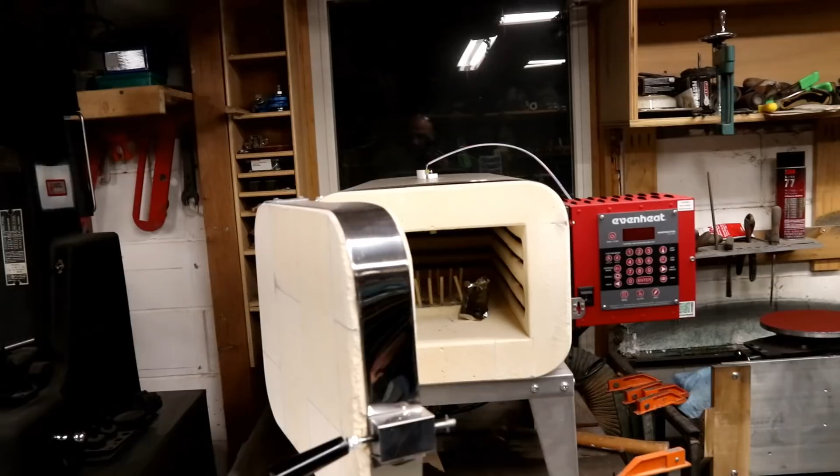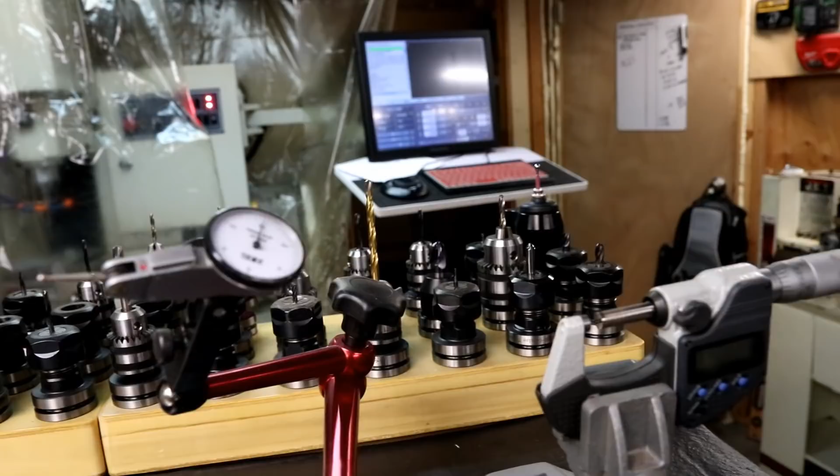Quick little spin around his shop - he's got a really nice setup. It's got the grinding station there, the heat treat station, and over here, the real reason why we're here, the 770 and all his tools set up. So I know I made it look like I just showed up, but I didn't.

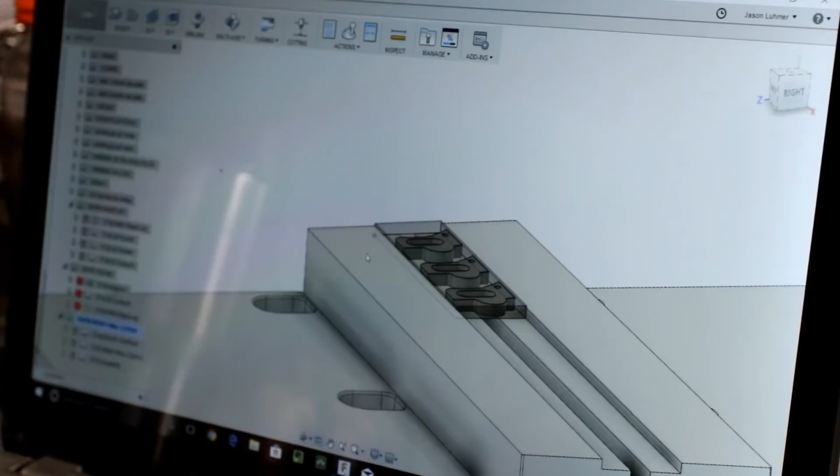I've been here for a few hours, and we've been working on some CAD and CAM stuff and doing a little photo stuff too. So he's got his laptop out. Yeah, so here we're working on lock inserts, and I'm just going over with Mike, showing him the CAM section. We spent a lot of time doing the model and the CAD section - he's got that pretty much down pat, so we're breaking into CAM tonight. I actually have to run some inserts for my Raven, and this is a relatively new program, so we're going to load it up, see how it goes. CAM, it takes a lot to learn. I just got modeling - we're really playing video games. Right.

Yeah, we were playing Assassin's Creed, and shopping on the internet and buying all kinds of new tools. Jason totally tricked me into buying a, what is that thing?

A 3D printer. Let me show you why. You guys got to see this. Alright, Mike, let's see if we can open his computer up real quick.

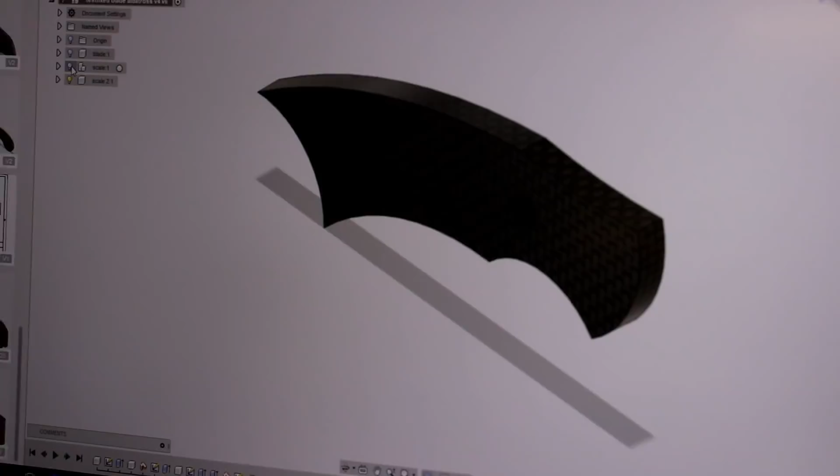Mike showed up and did an awesome job. This is a scale for one of his new designs, and you can see it's not in Mike's signature style. Mike doesn't really like the slab sides all that much, he likes to round everything off, but it's kind of an advanced move and kind of difficult to go ahead and round this off.

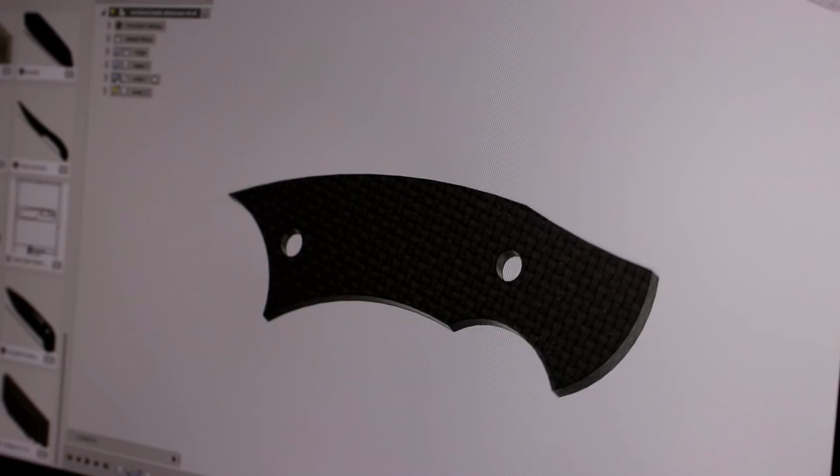So we went through and I showed him how to model, basically turn that into this. It's the same exact thing. How cool is that, guys? It's all contoured and nice. It's going to feel great in the hand.

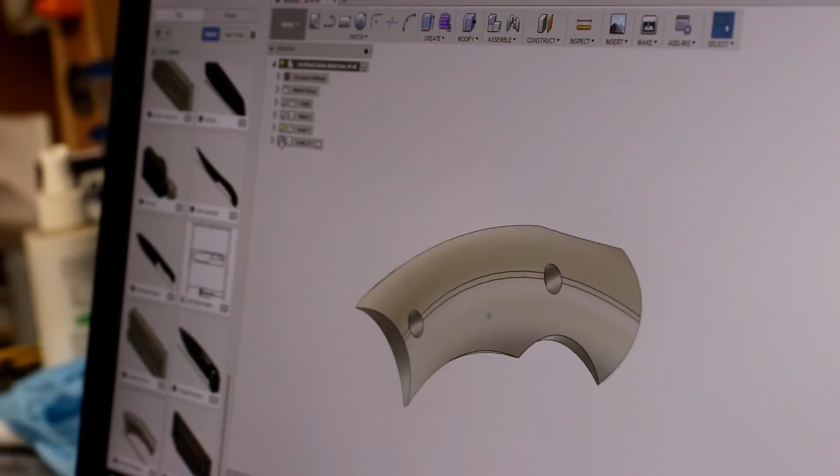Right off the machine, you can contour it to this instead of having slab sides with chamfered edges, which is nice too, but I wanted to get this contoured, kind of like a 1911 pistol grip. Which it kind of looks like. Actually, if you hold it that way, it looks like it could be an old revolver grip.

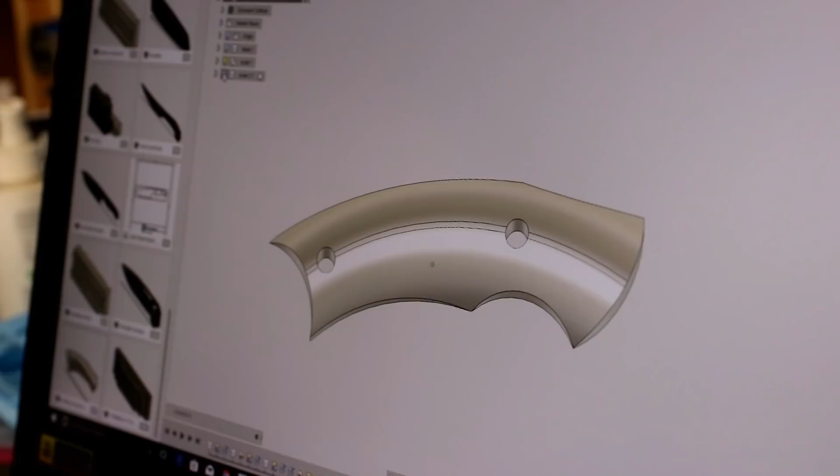But the most important thing is you're not going to be setting yourself on fire at the grinder anymore. So I told Mike, hey, he was asking about this printer I got right here.

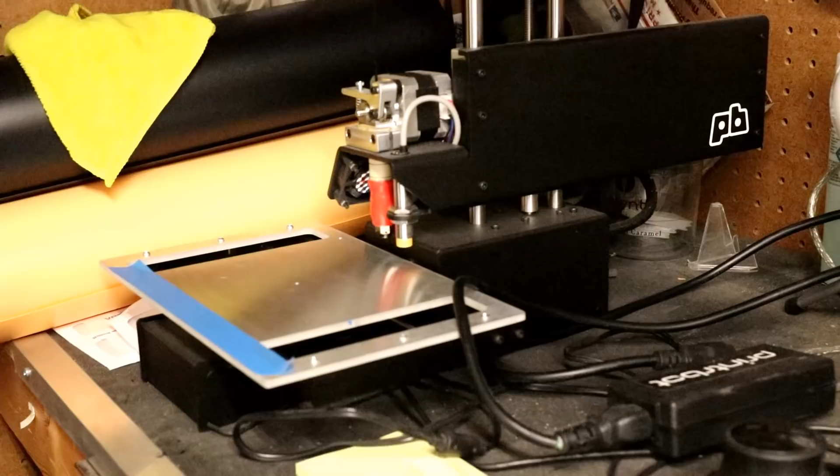It's a Printrbot. It is the best 3D printer for the bang for the buck. I mean, it blows my mind. So I said, hey Mike, this is what sold me on it.

I said, hey Mike, you know how I use it for everything now. I use it for my prototyping, so I'm not blowing money on titanium just to find out I put a stop pin somewhere. I made this entire knife on it.

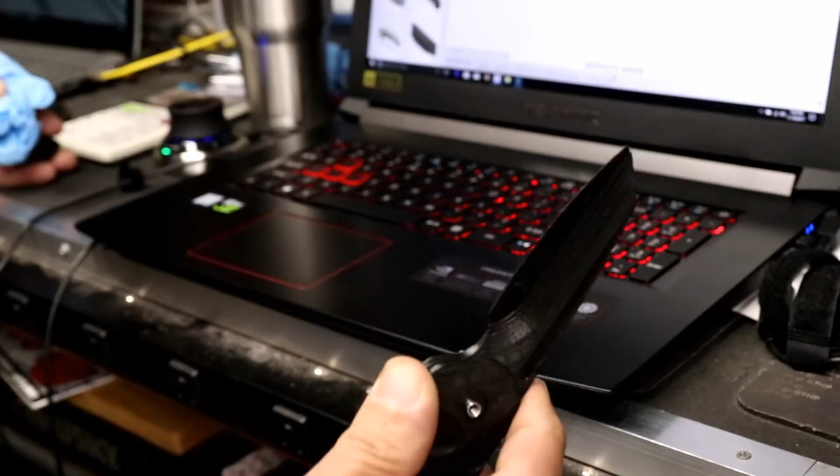It doesn't flip that good, but it's got everything. I took the stop pin out, but the stop pin hole, everything's in there. Pivot, backspacer, lock bar is cut. I mean, it's not a lock bar cut, but it shows me everything.

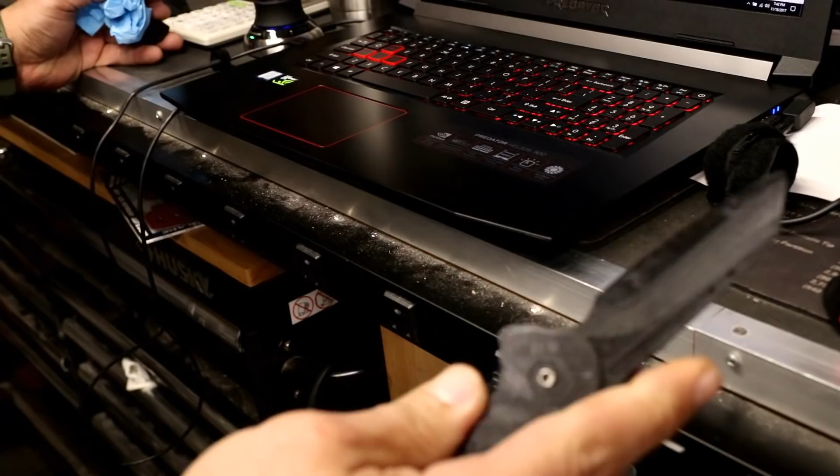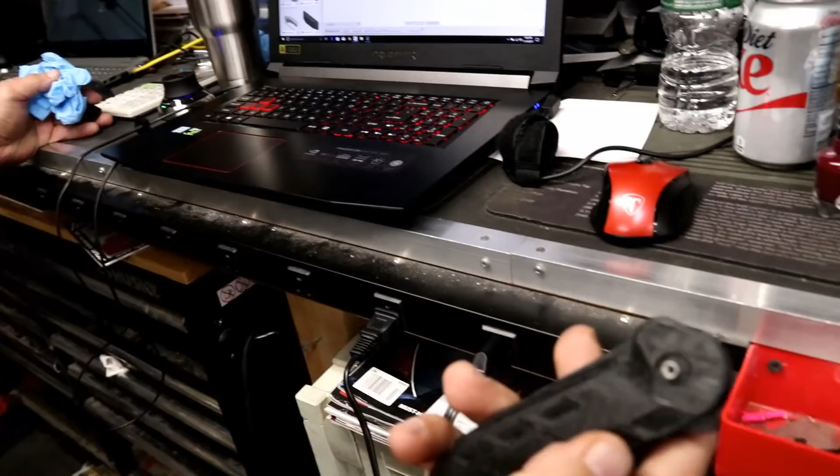Proof of concept. Put something in my hand, open my drawer and show them this knife. So this is his new knife, his FET model. He calls it the Merc.

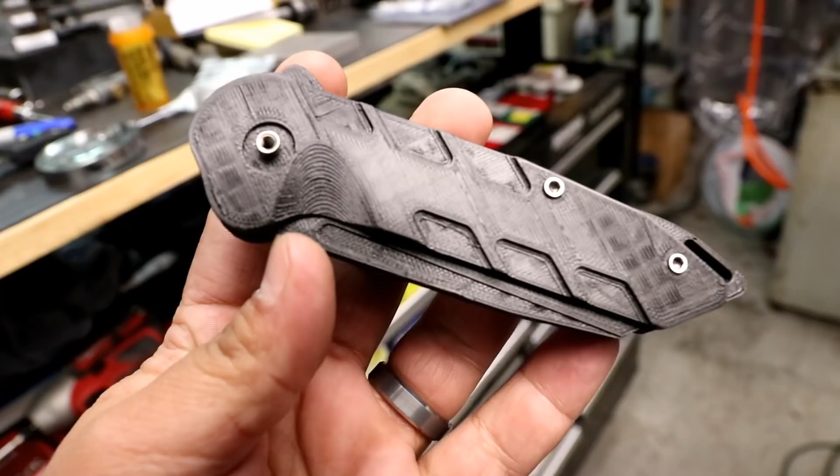And this is the 3D printed prototype, so he didn't have to waste all kinds of money on titanium and saw blades and do it the slow, hard way. Now we can see if this knife feels good in the hand, if the action is going to bump into the backspacer or anything like that.

So we have the, oh not this one. Here we go. The completed model is this guy right here, and I'm not going to pick it up because I have a ring on my finger and I don't want to scratch it up. Oh, you're going to scratch that? That's Cerakote, this is made to be beat the hell out of.

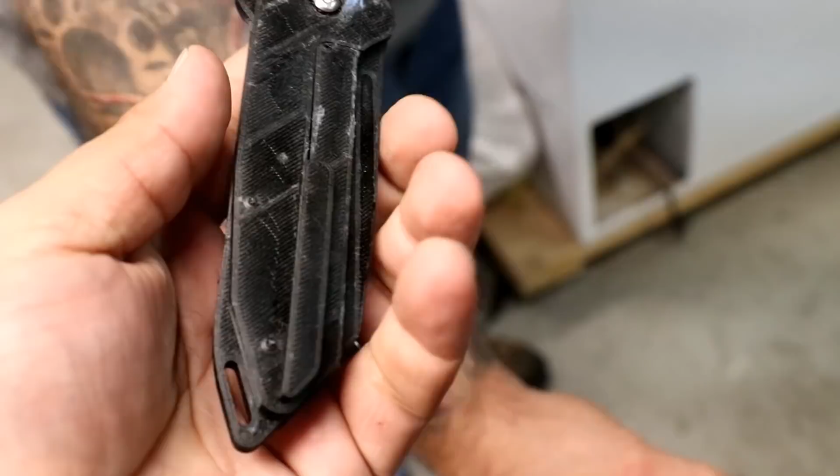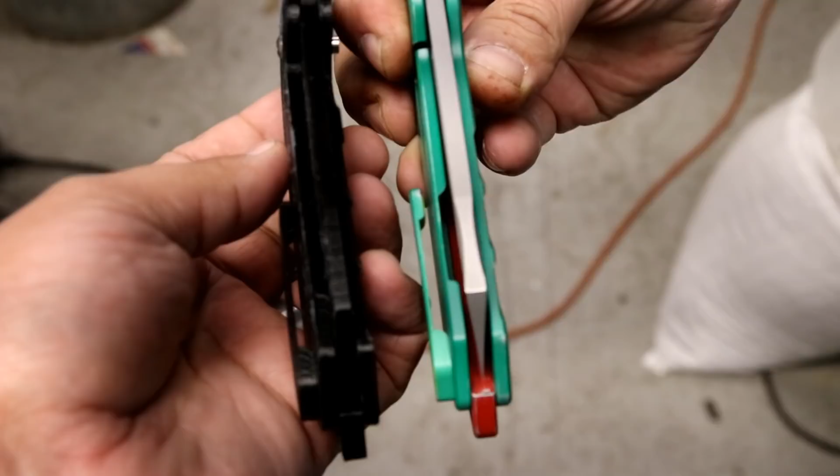There we go, Jason will hold it up for us so we can compare. If it'll focus, come on focus. There we go. You can see it's literally a one-to-one prototype of the exact same specs, just printed on a printer.

It saved a ton of time, a ton of money, and contrary to what people say on the internet and in forums that it'll take 3-4 hours, that printed in under an hour. And you don't need a 12-inch by 12-inch bed, this works with a 6-inch by 6-inch.

Yeah, I'm not going to do Bowie knives on it or giant fixed blades, but for what I'm doing, it works perfectly. So anyway, back to what we were talking about.

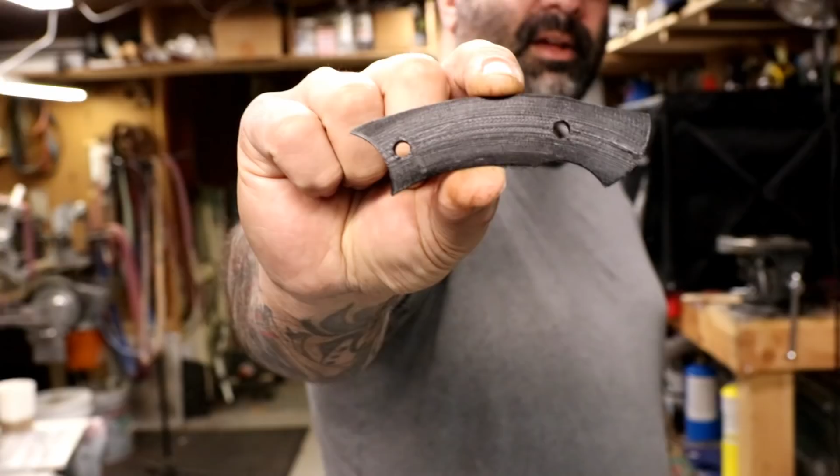We printed out that scale that you just saw, and we'll go over to the computer so you can hold it up next to it. This is a printed prototype of one of my scales, and this is exactly one-to-one of what it would look like. We'll hold it up to the computer here.

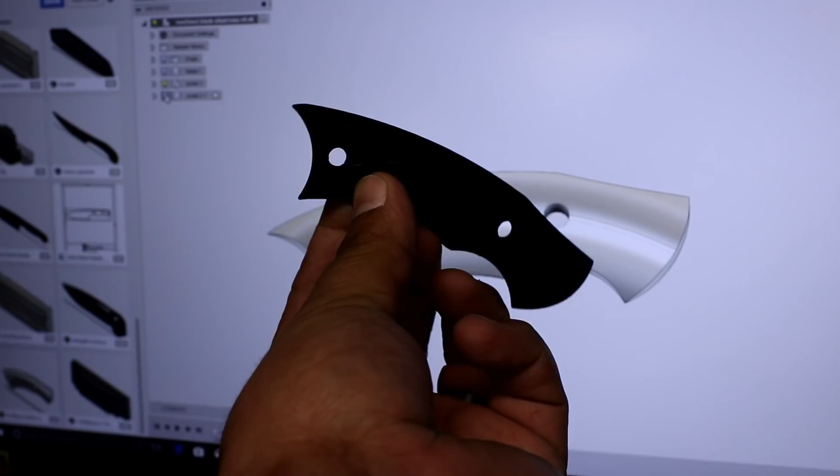It's exact, as if I made it in the shop—life size, everything. Of course, this is a karambit, so it would have a pinky hole. Now I can see if there are any hot spots, any problems with it. And so far, so good.

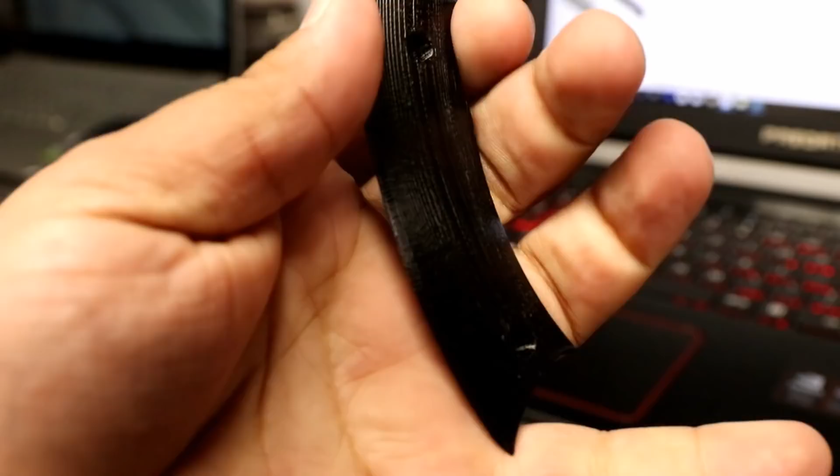I like this. After he printed this, I had to have one of these printer bots, so I went and ordered one. We'll see how much I struggle with it, but it doesn't look too terrifying. You'll be fine, there's no fixturing involved, nothing.

Mike's a bad influence too, because he came over. I have trouble taking pictures of my work.

So I talked him into one of these, and this is probably going to blind the camera, but it's a photo box—an incubator for chickens. Right, yeah, the chicken incubator. As you can see, it lights up everything nicely.

I'll pop in a couple of pictures here to show what good lighting can do for you. This is like a $50-60 box on Amazon. Totally worth it, and really helped us clean up our pictures really nice.

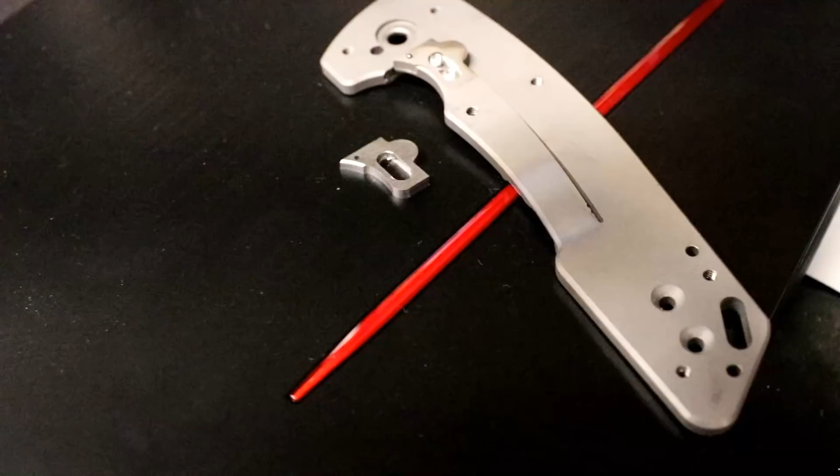Right here, this is what we're going to make right now—this little part right here, and this is focus. There we go. This is just a steel lock bar insert with a built-in over travel that Jason has designed for his—this is his Raven.

This is one of his scales right here, and as you can see, he has one installed, which is nice because—hear that?—it won't over travel, but he has clearance enough where you can easily unlock the knife and clear the detent ball and everything.

So he's really figured out the tolerances, and this is just a great example of machining a small part, something that I could learn. So he invited me over today to learn something easy, instead of tackling a whole knife at once—we're going to tackle it little piece by piece.

It's kind of cool checking out another maker's space, the way he has everything set up. So we're going to go check out the machine, but I just want to show you the other corner real quick, because a lot of people give Jason a hard time about it, but I love this setup.

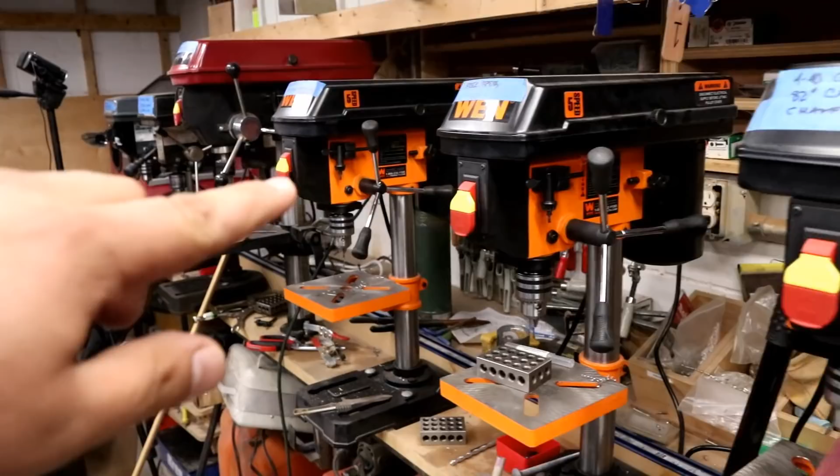Yeah, I'm showing the drill presses. Look at this—talk about, you want to see somebody drill some holes really fast? He's got a drill press for everything that he does, and this way you don't have to sit there and fumble, and he's got everything labeled.

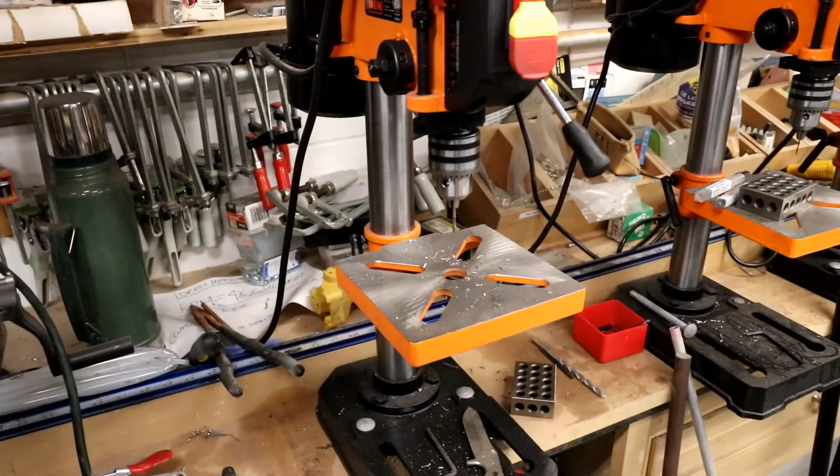Right here, number 31 drill, and that's what the drill does, that's the RPM he runs at. Super efficient guy, and I really love to see that kind of stuff.

From ancient drill presses to brand new Wens over here. Oh, I got my big ancient one that's going to be coming, I just haven't put it in here yet. Right, yeah, he's got the big boy coming back.

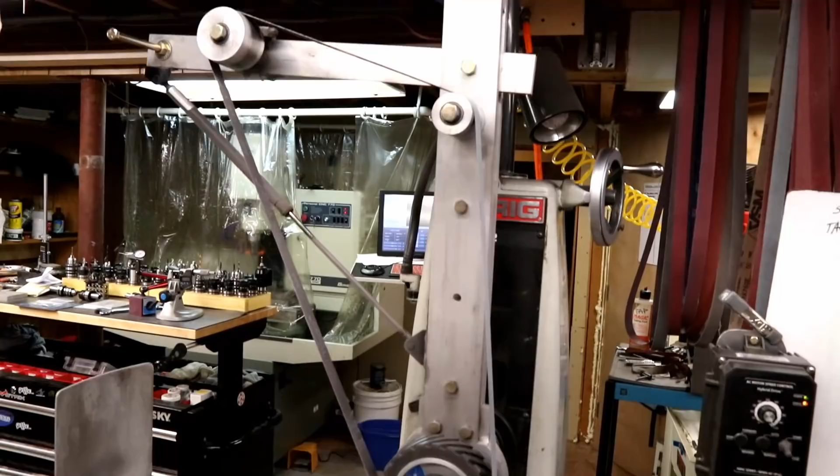And then my little 440, the baby CNC. Hey, does this look familiar, guys? You remember when I showed you this? Well, guess who did it first? That's why mine looks exactly the same.

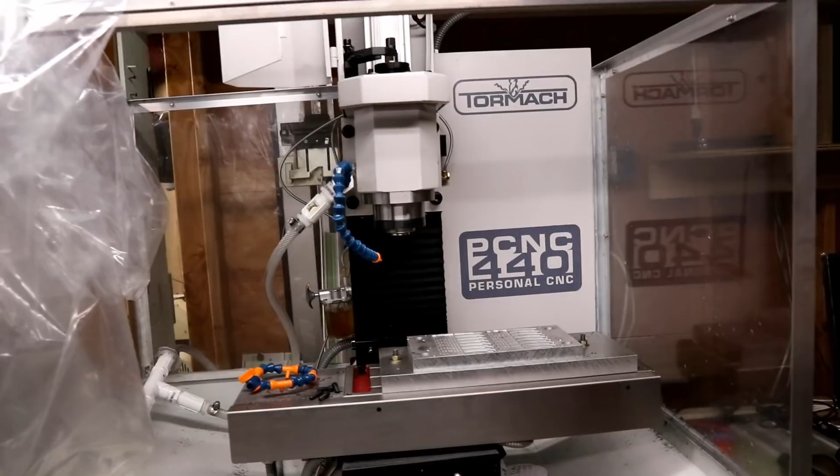And he's got the little 440 over here, and he's got pocket clips for his Raven all set up in here. So this is his dedicated pocket clip, but he was saying that this machine can hang with the big boy. So just real quick, if you want to say something about the 440.

This is what I'm going to say—I have both machines, as you guys see. The 770 is a superior machine because it has more bells and whistles, it has a bigger work envelope, but the 440 will do everything the 770 will do, and it's great surface finish.

And don't let internet influence you. These are the pocket clips that I make on there—titanium. I mean, this surface finish is good.

Why don't you show them some of the pattern that you put on top of them? Oh, this one with the pattern. Yeah, take a look at that, guys. That's all done on the 440, and this is intricate work, including thread milling.

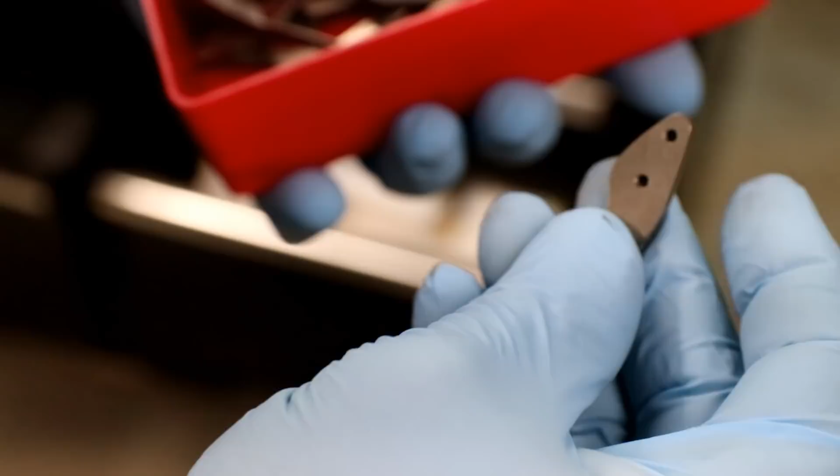These are blind holes, 440 thread milling. Yeah, that's for those of you that are not familiar with thread milling—you take this tiny little cutter. Let me see if I can show you one.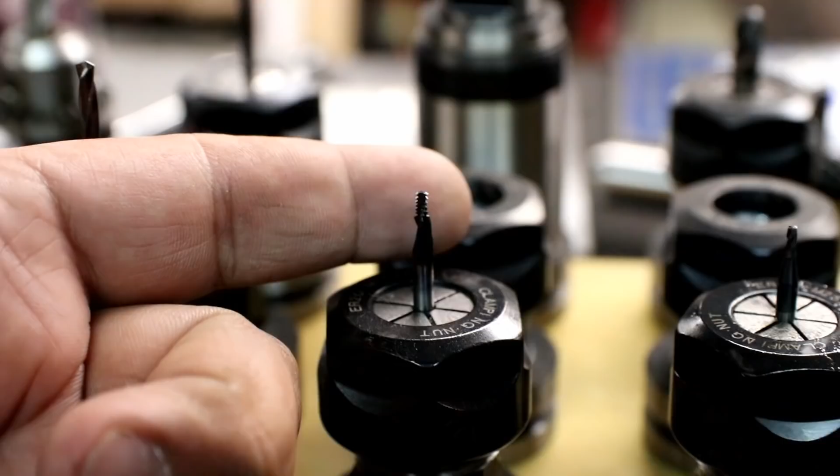They're like $60 each, and they snap like toothpicks. So a lot of people think that the Tormach machines can't handle it. But how many holes have you tapped with that? Geez, probably 1,000 holes, and that's the first one I had. I was very concerned and very nervous that I was going to break it because, like Mike said, they're $60 each, and you know I'm not a rich man.

A lot of people say that the Tormach is not an accurate machine, but the truth is for knife making, it's plenty accurate. I know a lot of guys that use it. The guys having problems, they got to look at their setup and their material prep. That's probably the biggest thing they got to look at. It's very important, even to do what we're doing.

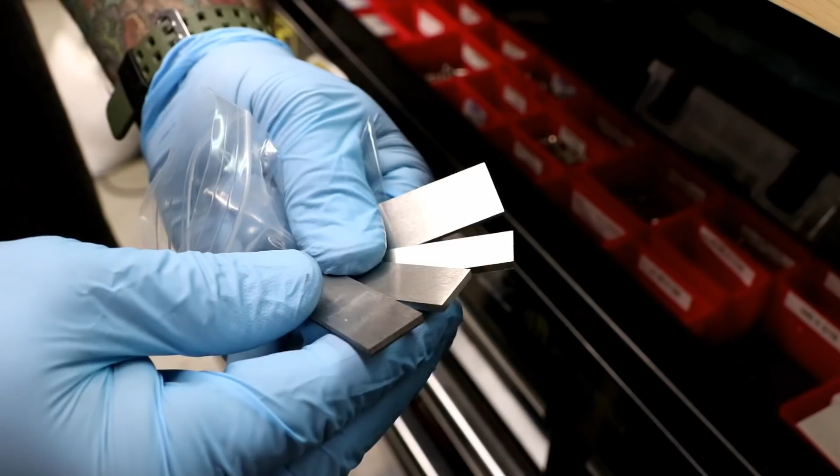These inserts, this is the material that I prep for. You can't rush this kind of stuff. These are all surface ground, exact thickness, and squared on all four edges, so that when I put them in, my CAD works. The numbers in real life are the same as in the program. And when they're sitting down, they're sitting in that vise flat and you're not having problems.

That's not saying mistakes don't happen. Who knows, we might have a nice little crash today. You never know, right, that's just the nature of the beast. But you have to be very detail oriented and have a system of checks and balances when you're doing this to help mitigate any type of problems.

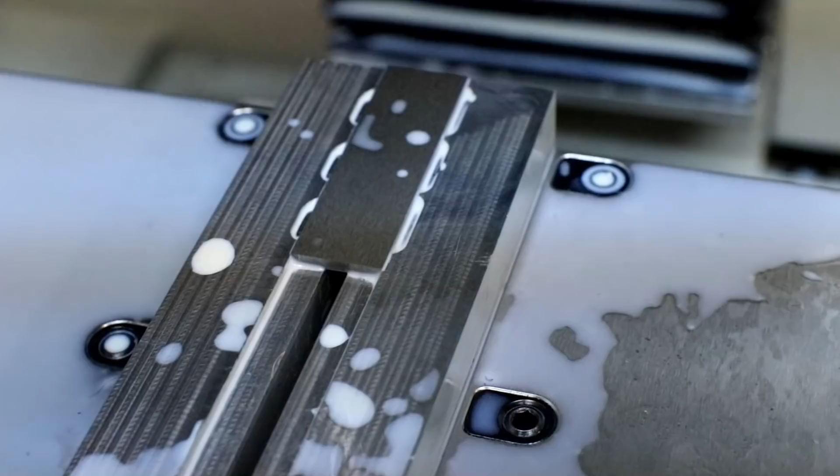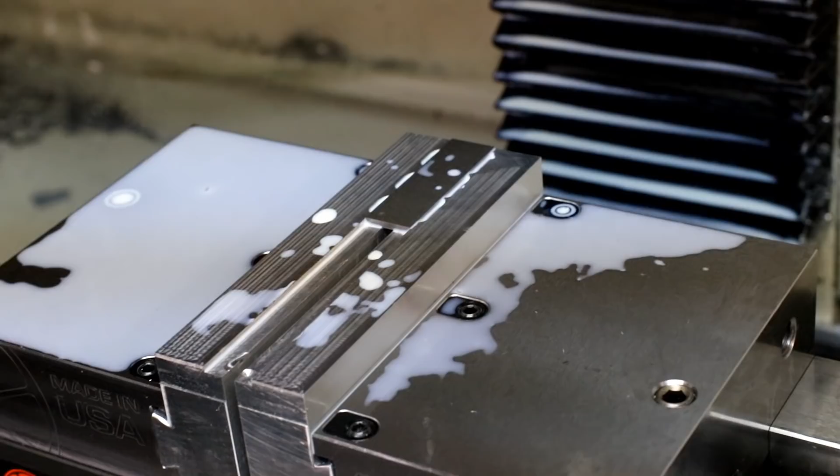He has his precision stock that he made precision himself. It wasn't precision when he got it. What he's trying to say is these machines are only as accurate as the stuff you feed it, including the information, the parts, the raw materials. That's one thing he's been really hammering home with me, trying to make me understand. And that's how you get it done, how you get the tolerances and the desirable results.

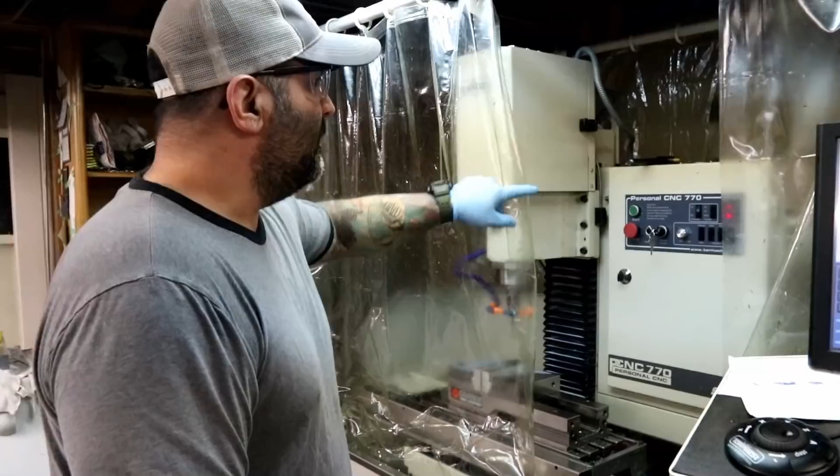We just loaded everything up, we're going to run it. There's my beautiful enclosure, the dirty shower curtain. You see where I got the shower curtain idea from too? Hey, it works better than the $2,000 Tormach enclosure that everyone says leaks like a sieve. This doesn't leak anywhere.

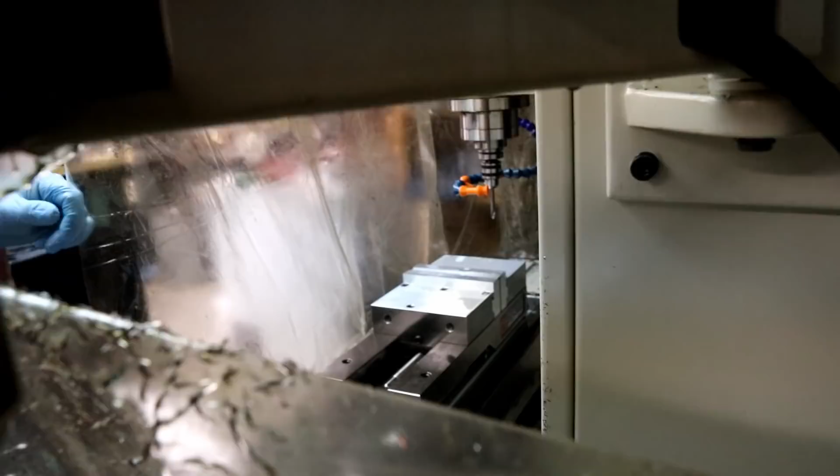All right, so we're going to go through this little hole in the back here, my observation hole. When I first started, I used to hide there when I'd hit cycle start so I didn't get hit with something. Alright, I'll do my best to hold it steady.

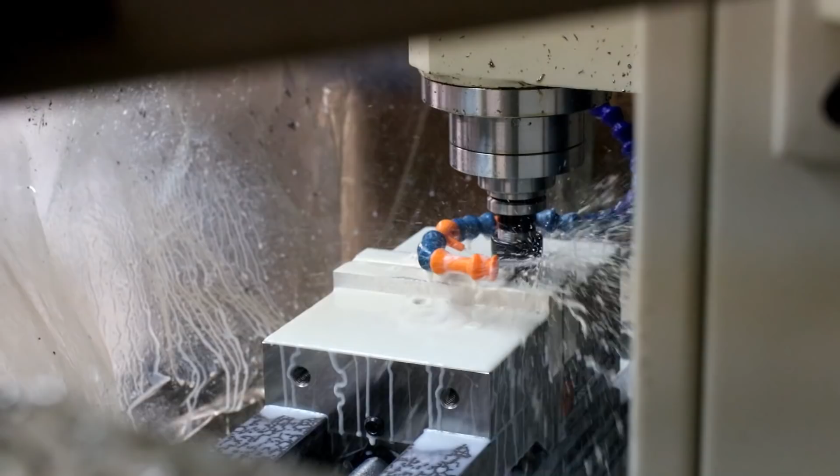There we go, now it's digging in. I'm running it kind of aggressively. This is S35 stainless, I'm pushing it fairly aggressively, running at 6,112 RPM and a feed rate of 12.2 inches per minute. Works real good. With smaller cutters, contrary to what you'd think, you could push them pretty hard, and I'd rather get the efficiency out of them.

Things that break, you hear it under strain. As you're working with this stuff, you're going to learn when it sounds like it's going to break. It's a very fine line.

I've heard that a lot about machining by ear. Years doing carpentry, you learn, and you guys that work in the trades with saws, you can tell when a saw is going to kick back cutting through a sheet of plywood because they'll start to bind. That sound right there, you can actually hear the chips cutting. You're not worried about it breaking, but if you're not used to that, you're going to think, oh my goodness, it's going to break.

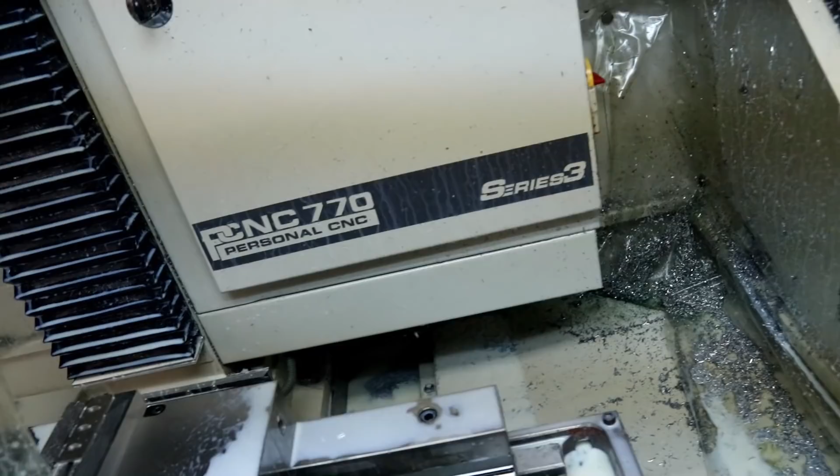We'll take a look at this op, and you guys have seen machining before, so we're not just going to film the entire thing, but as you can see right there, it milled those pockets. Now we'll cut it here, and we'll come back when we have the finished parts and show you, because right now we're just going to change the tool again.

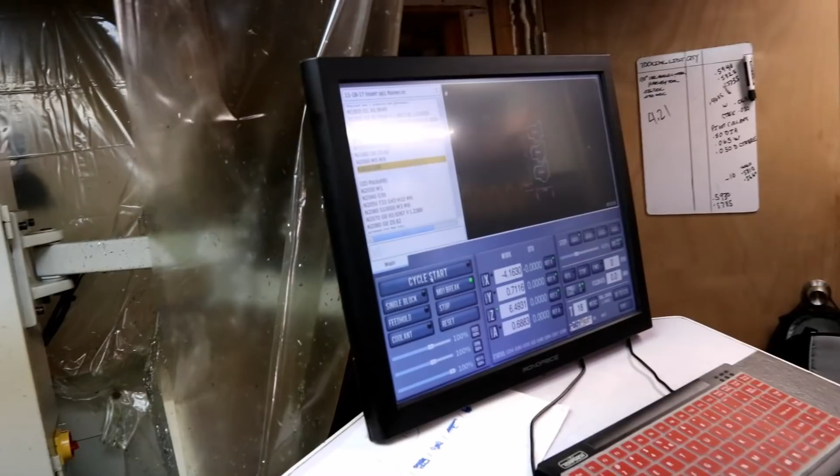Yeah, we're just doing another tool change. We're going to go in and do the secondary pocket. That pocket right there was for the flange to hold the screws down. Now we're doing a secondary pocket with a 16th inch end mill for the 256 screws. It's tiny, kind of intricate. Then we're going to do a contour with the 1/8 inch to 50 thou, and then we can pull it out and show you guys what we do. It has to get flipped and put in another fixture, and the rest of it cut out, and then it's all done.

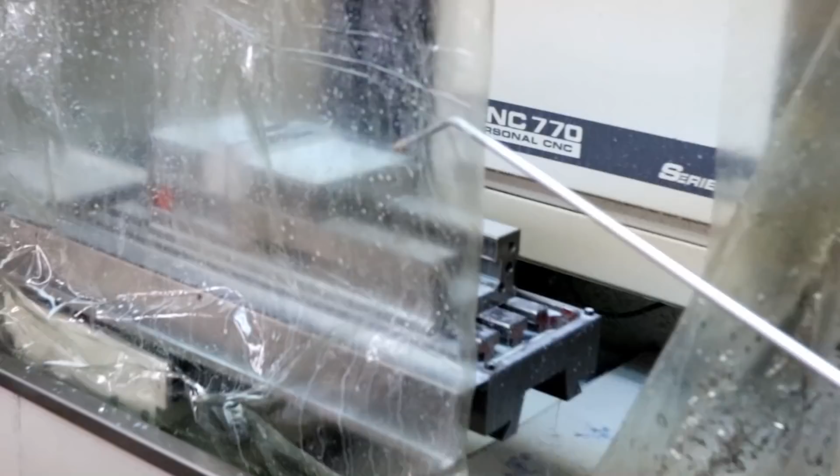Alright, so it's been about 7 minutes. We're just blowing it off now, and we'll take a look.

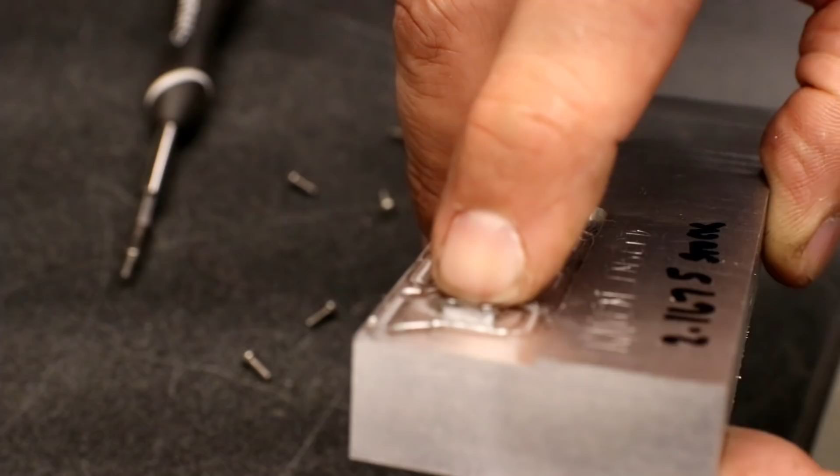That first op is done. There's those lock bar inserts. This is the fixture right here. Those little bosses mimic what I have inside of my lock bar that holds it. So this is machined to just snap right in. I'm sure you heard the snap. There's zero play any way you go. That's how accurate, and these are tiny parts, that's how accurate the Tormach is.

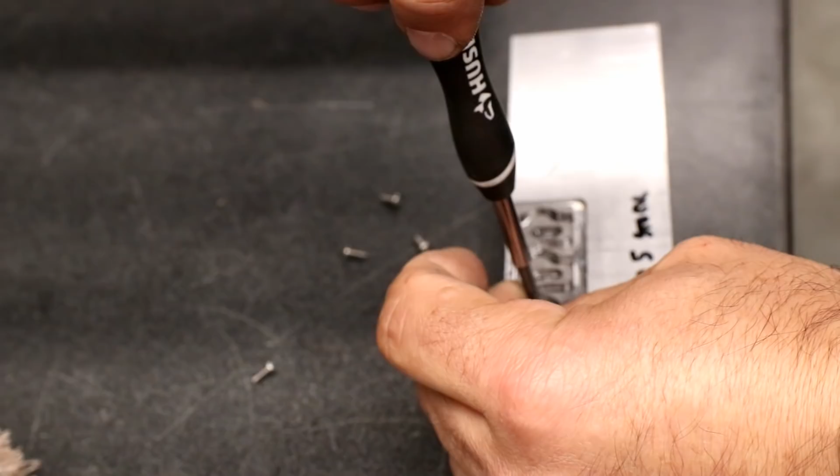So I don't care what anybody says. If somebody says their Tormach is not accurate and that's why they're not producing accurate parts, that's because their setup is not right, they're doing something wrong, or there is something drastically wrong with that particular machine. And I'm not a Tormach fanboy, believe me. Neither of us are. I've had the Tormach rep here twice already for other reasons. And all the problems that I thought I initially had with it were because of my setup.

Because once I changed my setup and really took the time to learn, that machine sat for how long, Mike? Like 6 months before I touched it. At least, yeah, I had it here. I'm coming up on that now too. Yeah, 6 months before I touched it. And I just sat here for 12, 14 hours a day learning everything about it.

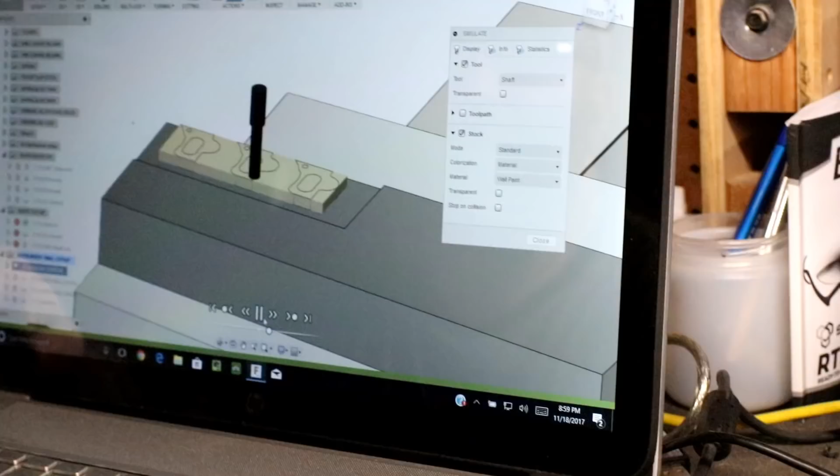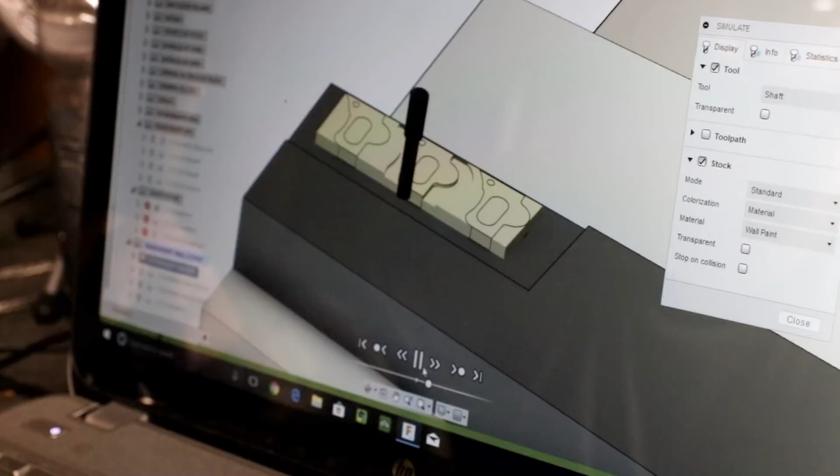So over here in CAM, there was a possible tool breakage issue that Jason wanted to address. So he's showing me how to implement different features in the way the cutter will remove the material, so nothing gets slung into the path of the end mill, binding it up and breaking it. We're going through a couple of different methods to tackle that problem. As you can see, it'll give you a 3D look of exactly what the CNC machine is going to do, hopefully, and not break anything.

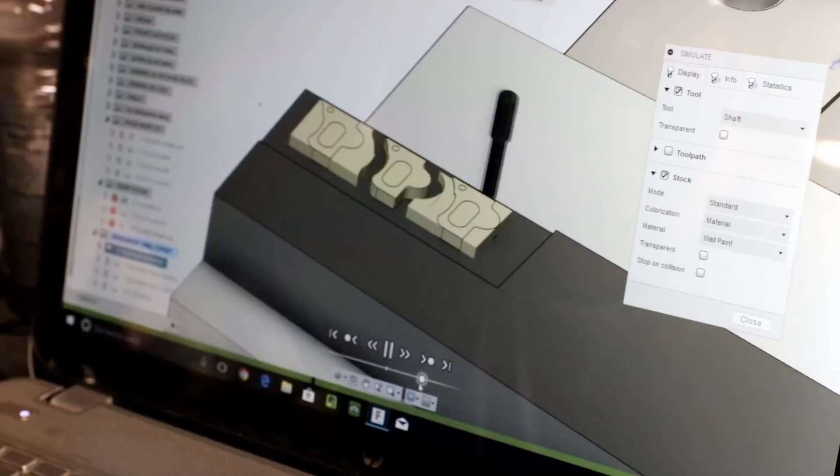This part's not the problem we're talking about. The problem that's coming up here, I'll speed it up. Now you can see to the right of the insert, it's no big deal, but when we cut off this piece and come to the last pass, it gets thinner. Right at that point, it could throw this chunk into the path of the end mill and break it. So we want to alleviate that problem and hopefully not break a tool.

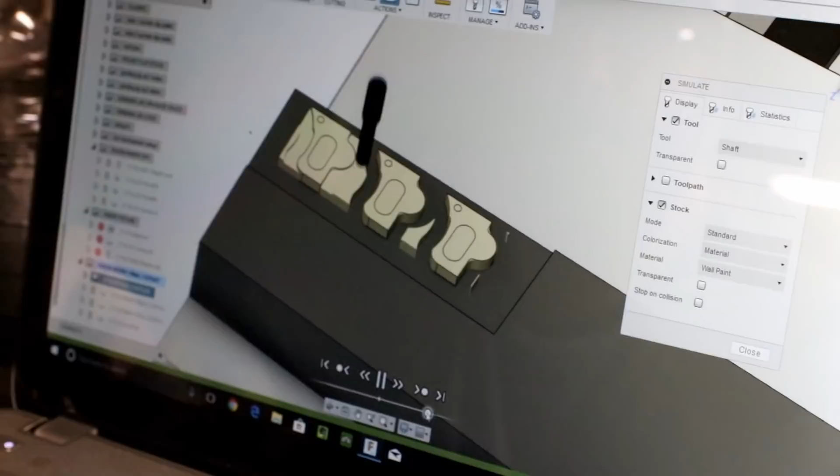But sometimes this stuff is, like Jason was saying, a lot of it's strategy. Sometimes it's trial and error. We tried it one way and he was having some breakage issues, so now we're trying it a different way. He's trying to show me everything so I have a full toolkit for when I go to do this myself.

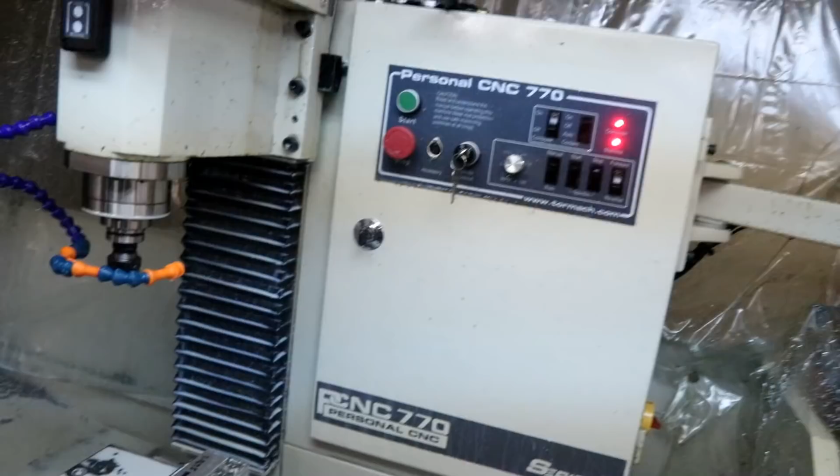Looks like we might be in the clear. Don't say that, I just think that now it's going to break. But look at that, nothing broke. The change in strategy worked. That's just a rough finish, but it's a pretty good surface finish. And the tool's still there.

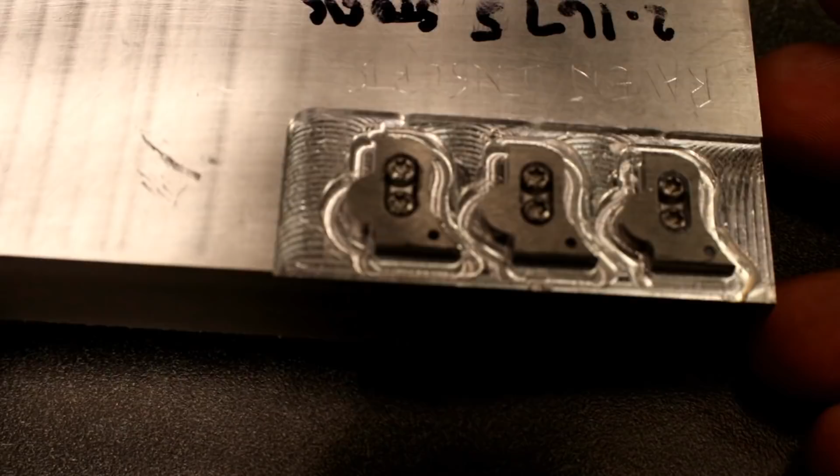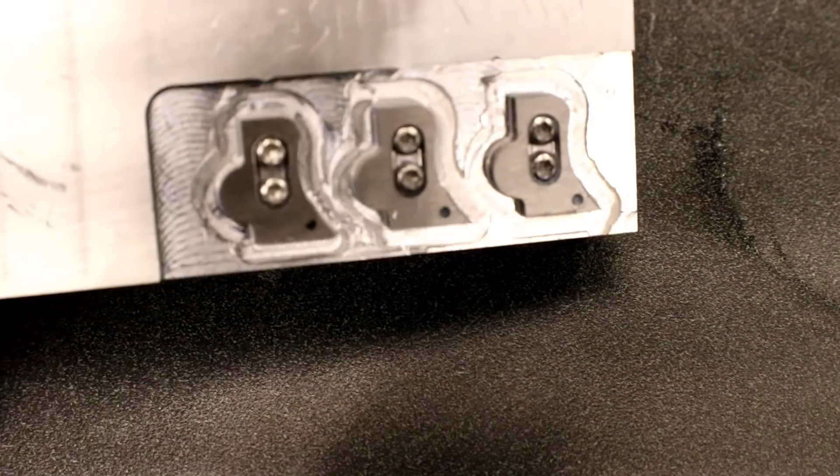And check that out, guys, we got the finished parts. They're ready to come off and go into heat treat. And this is what, S35VN? S35VN, same as the blade steel. All nice chamfered, nice surface finishes everywhere. If the camera would behave.

Very cool. A wonderful thing about knife making is you gotta find some of these old tools and hope for the best. Yeah, and right now I'm trying to find a Rockwell tester like he has here. This is in really great shape, but he had to drive hundreds of miles to get it. So we're searching the internet for somebody local, and we found one, but it looks pretty terrible. It's, I think, the same model as this one, but it looks like it's been stored outside.

This is the cool thing about hanging out with other knife makers, we don't just look at each other's knives and share tips and tricks of how to make them. I went to the New York Custom Knife Show with Jason, and he picked up this cool Hinderer slip joint that we're looking at. Awesome stuff. The parts came out great, and I think that's it.

We're gonna call it a night. It's getting late, we've been here for like 4, 5, 6 hours now, just working on parts. So yeah, I gotta get dinner. Right on, brother. Awesome, thanks for coming, man.